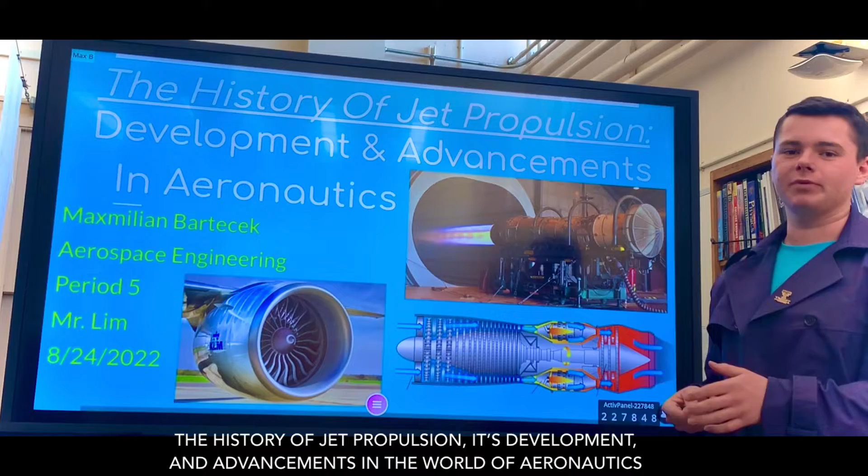For its development, the idea of what would be known today as a jet engine was generally conceptualized in the early 1900s, with earlier designs and patents for pulse jets, etc. But what is known as the first true working jet engine, or at least a prototype, was developed by English scientist Sir Frank Whittle in the mid to late 1930s.

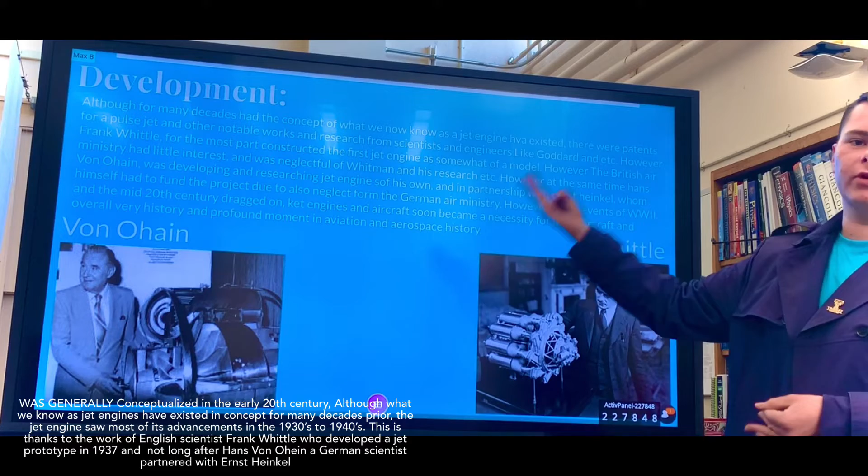However, the British Air Ministry at the time dismissed the idea, showing little to no interest. At the same time, German scientist Hans von Ohain was performing jet research of his own, creating his own prototypes, and partnered with Heinkel to bring the first ever jet aircraft to flight. These are two engineers whose work should not be forgotten. With the development of rocketry and pulse jets, it was only a matter of time before these engineering wonders were finally incorporated into aircraft design for flight.

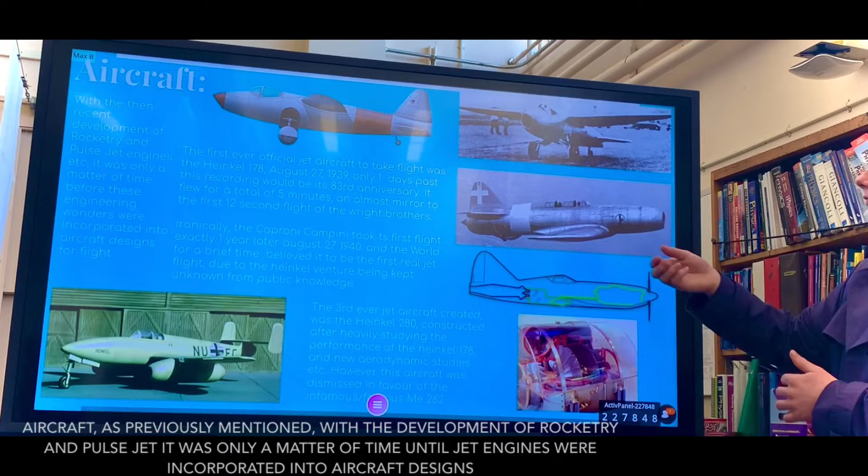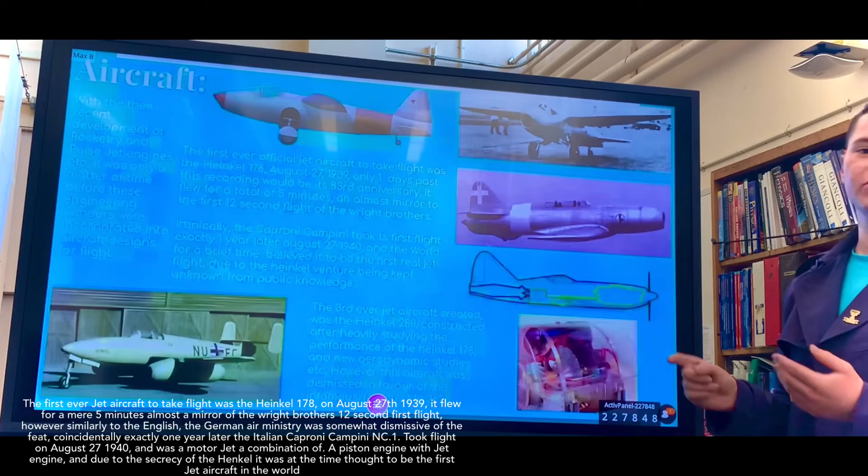The first ever official jet aircraft to take flight was the Heinkel 178 on August 27, 1939, and coincidentally, tomorrow would have been its 83rd anniversary of the first ever jet flight. It only flew for 5 minutes at its first time, almost a mirror of the Wright Brothers' 12-second flight. However, similarly to the British, the idea was generally dismissed and unimpressed by the German Air Ministry.

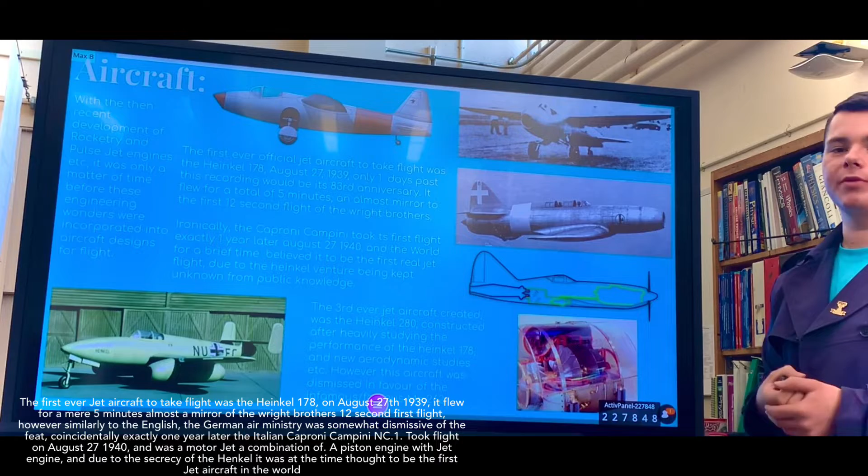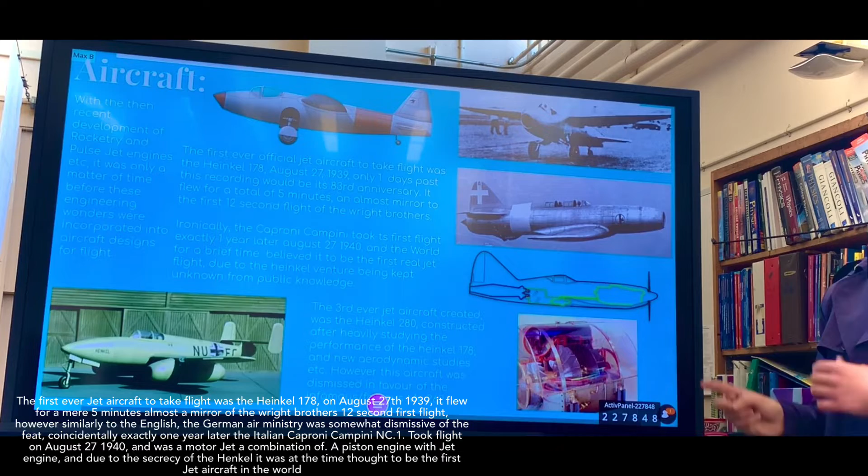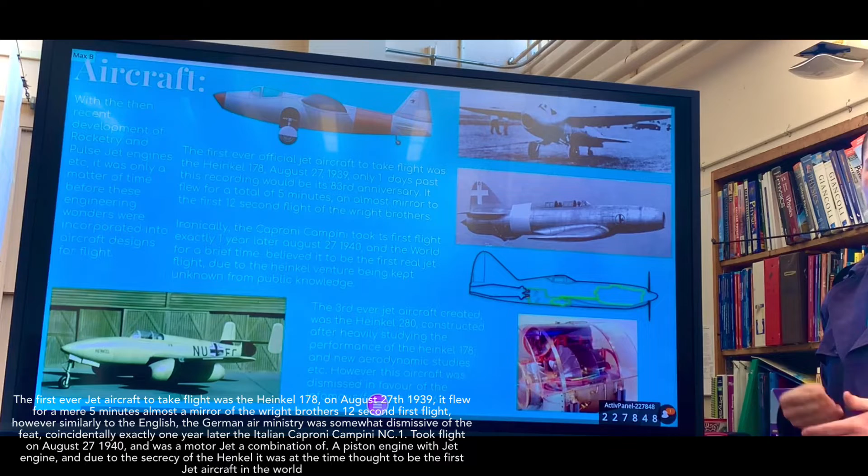Ironically, the Italians, exactly one year later on August 27, 1940, would develop the Caproni Campini N.1, which was actually believed to be the world's first ever jet, as the Heinkel was a secret project kept under wraps. However, this used what is known as a motor jet, similar to a prop or reciprocating engine, but it powers a jet engine.

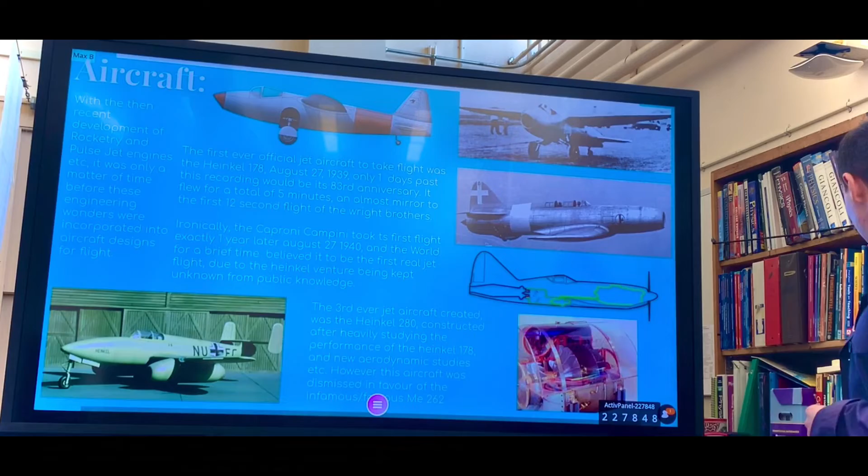The third ever jet aircraft to take flight was the Heinkel 280, another advancement on the same. Even after the Heinkel 178, and before, the German Air Ministry had been developing its own jet prototype, the Me-262, probably the most famous of the entire Second World War, and one that really saw combat during it. It took its first flight in 1941.

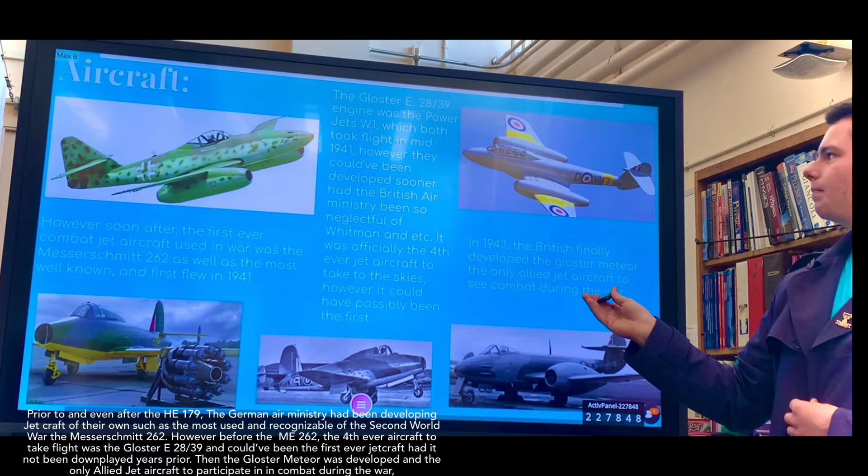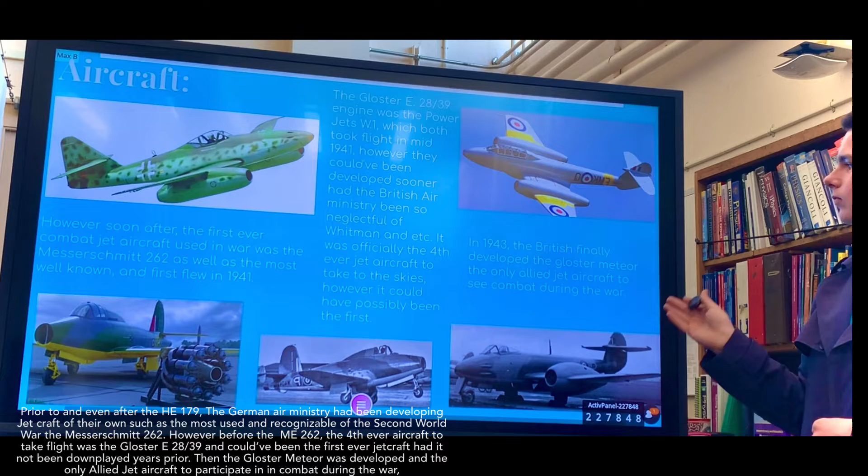However, the fourth ever aircraft to take flight, after the two Heinkels and the Italian Caproni Campini, was the Gloster E.28/39, which could have been the first ever jet aircraft had the British Air Ministry not dismissed its idea. Soon after, in 1943, came the first and only Allied jet aircraft to see service, the Gloster Meteor.

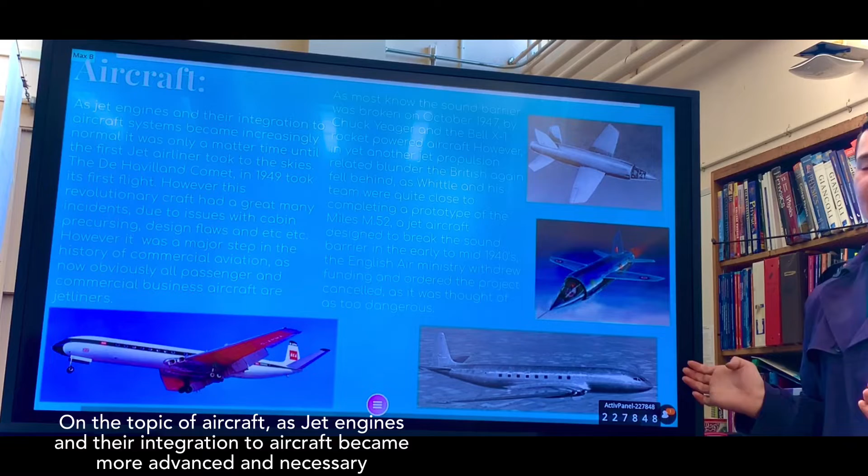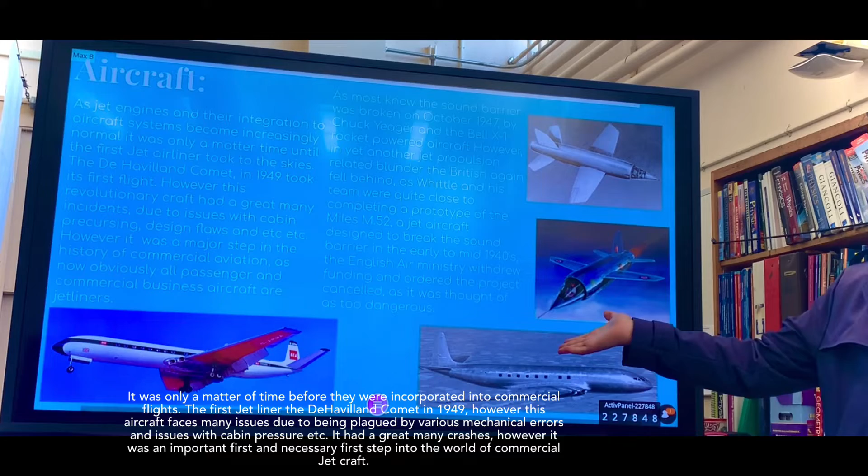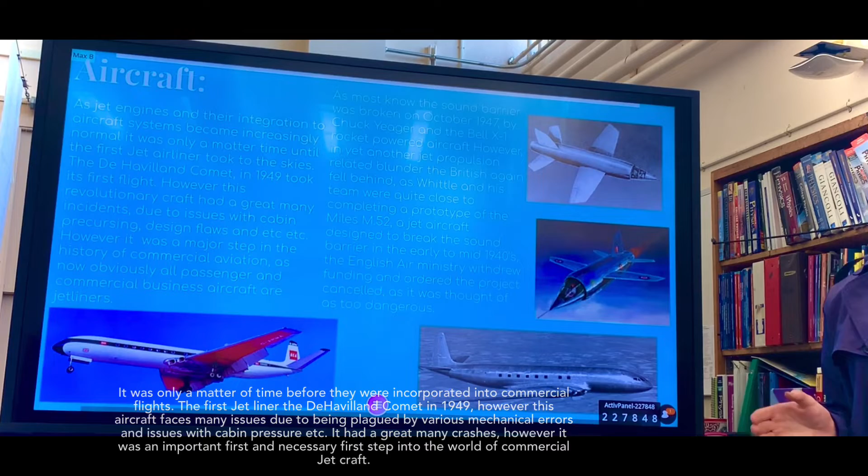On the topic of aircraft, as jet engines and their integration into aircraft systems became more advanced and necessary, especially for military use, it was only a matter of time before they were incorporated into jet airliners. The first being the de Havilland Comet in 1949. However, this aircraft faced quite many issues with its design flaws, pressurization, etc., but it was a necessary advancement for today's aircraft, which are almost all jet powered.

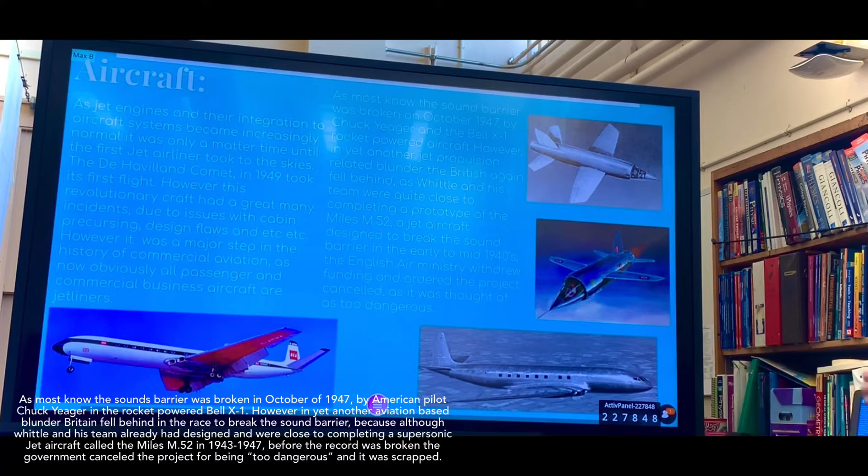As most know, the sound barrier was broken by American pilot Chuck Yeager in October 1947 in the Bell X-1, which is a rocket-powered aircraft. However, in yet another British aviation blunder, the Miles M.52, a prototype developed by Whittle and his team, used a jet engine, as opposed to the rocket-powered Bell X-1, to break the sound barrier.

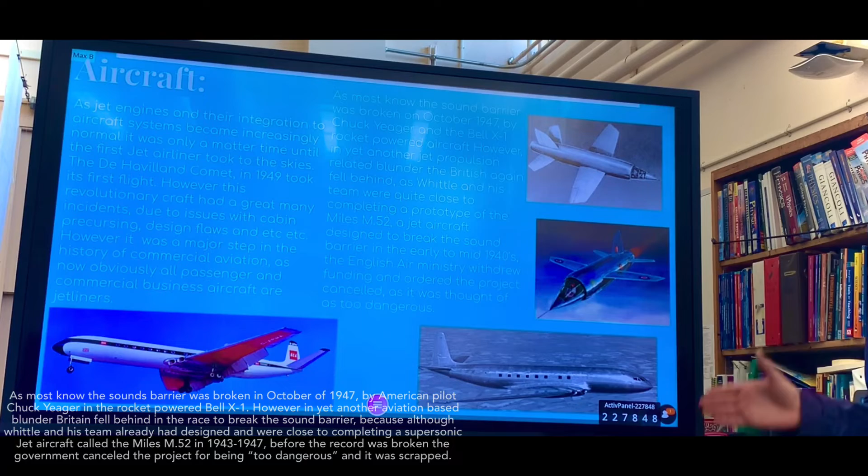However, as they soon came close to finishing the prototype, the operation was shut down by the British government, being deemed too dangerous.

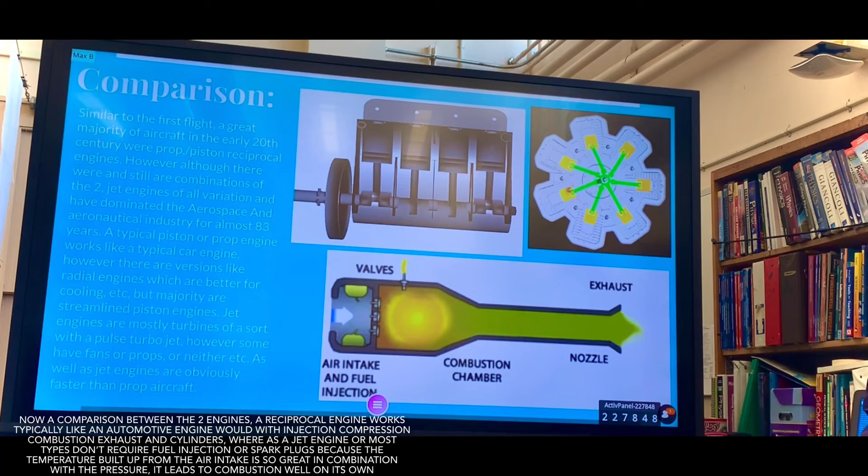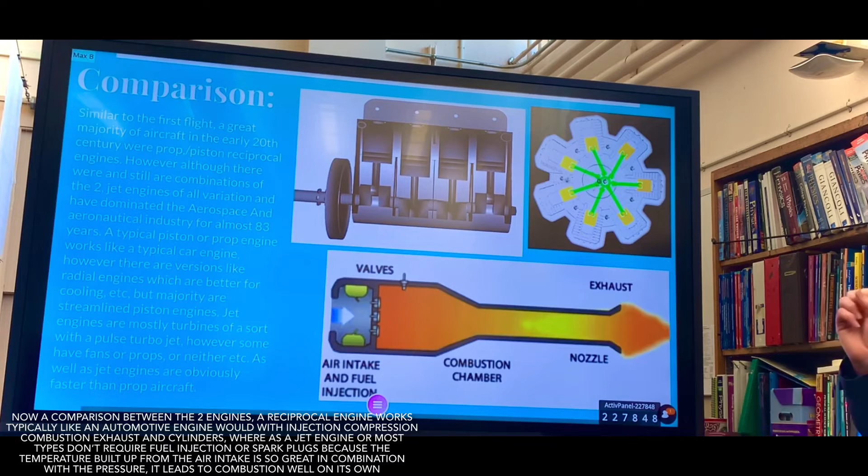Now, the comparison between the two engines: a reciprocal engine, or piston engine, which typically works like a car engine, has injection of fuel, compression, combustion, and exhaust. However, in a jet engine, the air intake is so great that it doesn't require spark plugs or fuel injection, and as its pressure builds up, so does its combustion and its exhaust.

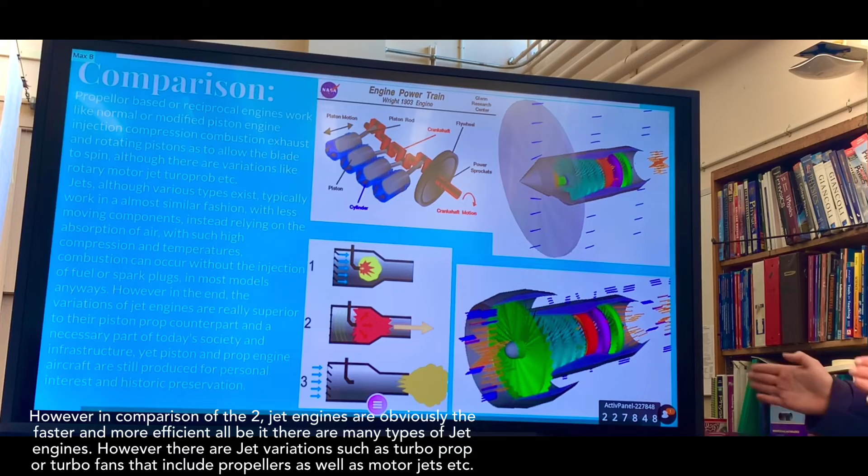However, in comparing the two, jet engines are obviously the faster and more efficient, as there are many variations, such as turboprops and turbofans.

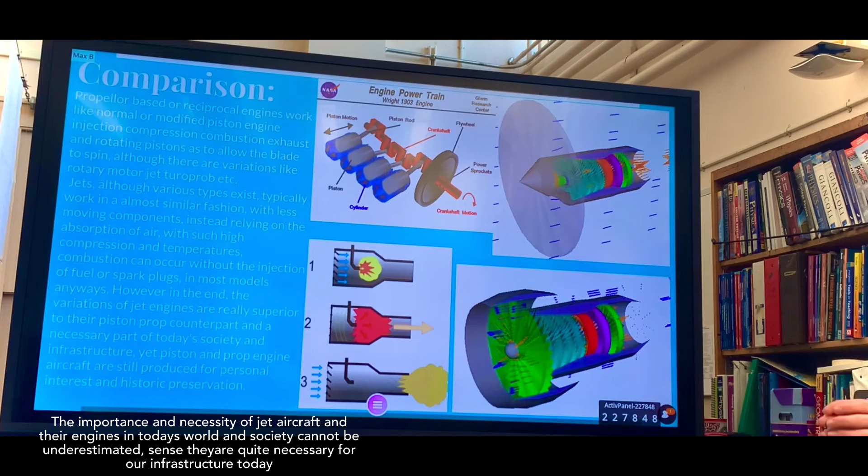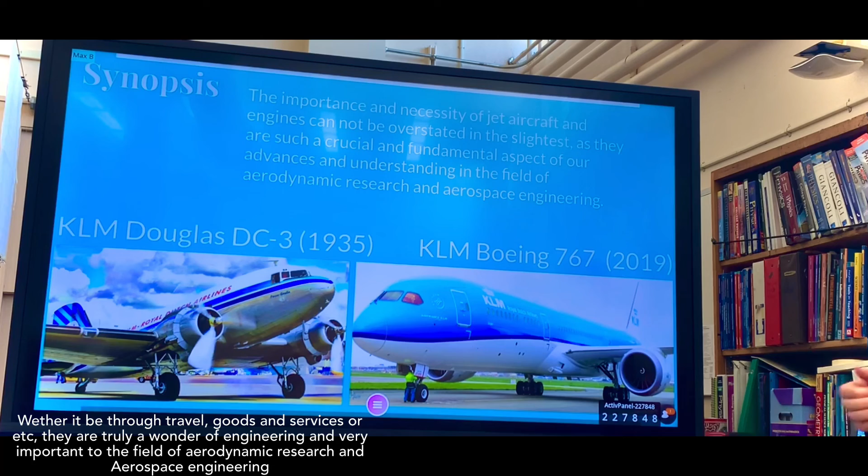And as a synopsis, the importance and necessity of jet aircraft and their engines cannot be underestimated in today's society, as they are so necessary for our infrastructure today, whether it be through travel, goods and services, etc. They are truly a wonder of engineering and very important to aerodynamic research and aerospace engineering.